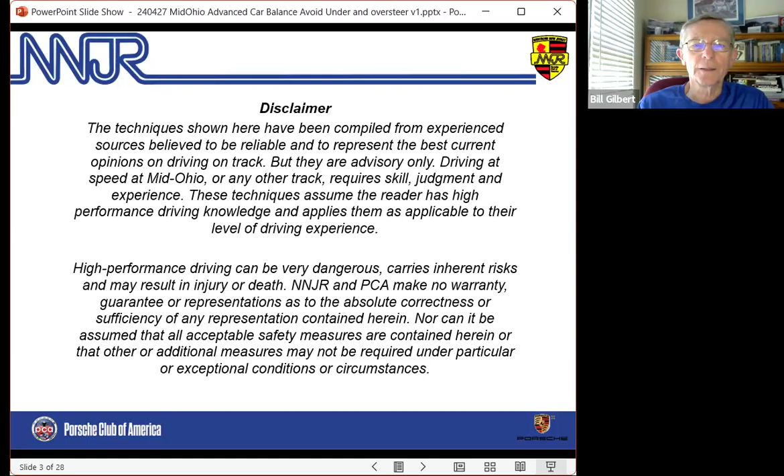But let's dive in. So car balance. First, the normal disclaimer: we're going to talk about some techniques and tips here today that we hope you'll find useful, but you use them at your own risk.

So here's some definitions and examples about balance. Vic Elford, who some of you may know, was a terrific driver back in the day and recently passed away. He said in his book about driving, and in talks that I heard, that it's all about balance - more important than any other aspect of driving the car.

And here's some quotes about how professional drivers are rarely in a hurry. They're smooth, flowing transitions - those kinds of words.

So what determines car balance? Well, obviously car setup does, and we're just going to touch on that very briefly today. But I have some material in the appendix that, if you think your car setup needs help, will give you a nice cookbook for how to go about improving it.

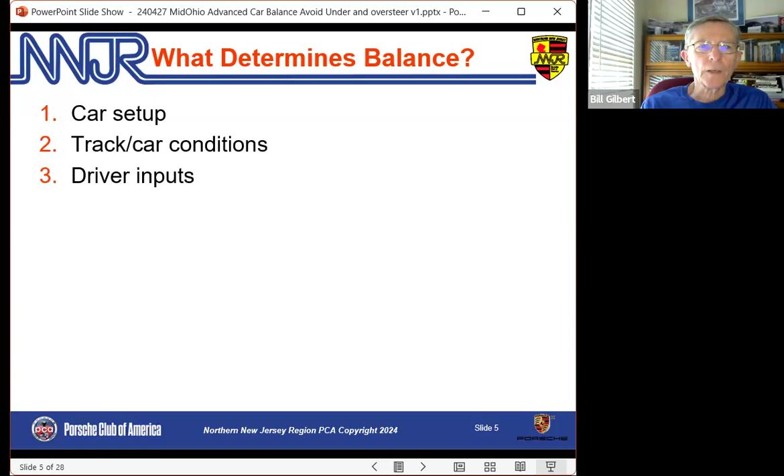Next, the track or car conditions can affect car balance. Obviously a wet versus dry track or a hot versus cold track may affect it. And last, but not least - in fact first - are driver inputs. What the driver does can affect car balance, frankly, more than anything else, unless the car is set up very, very poorly.

So let's dive in. First, car setup. The good news is modern Porsches are set up very well by the Porsche engineers. And so if you have any modern Porsche - or even one from 30 years ago - it's set up pretty well. Partly as a result, most cars that come to a DE event have very good handling. So balance may not be perfect, but you might need a pro to find out.

And to that point, as the slide says, at some point any car is going to have some kind of a handling issue. But if I as a driver am not good enough to feel the handling issues, then focus on the driving - the car is immaterial at that point.

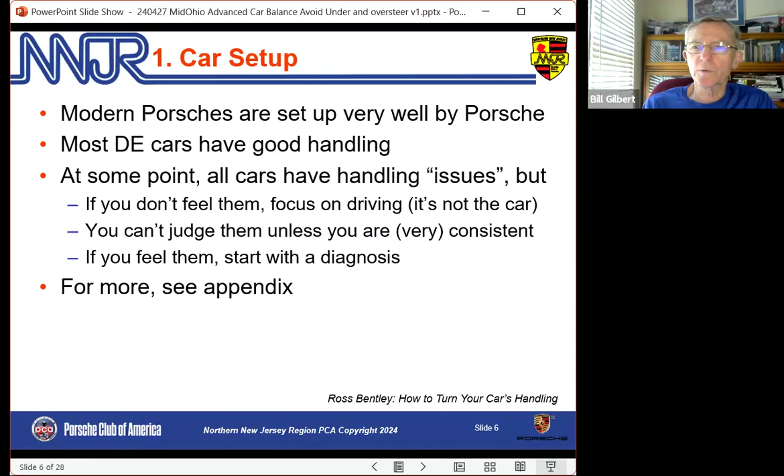Anyway, there's a lot more on this in the appendix, so you'll have the slides and references to some great Ross Bentley material on that. Because today I want to move on to other things that affect car balance, mainly the driver, but we'll talk briefly here about track conditions.

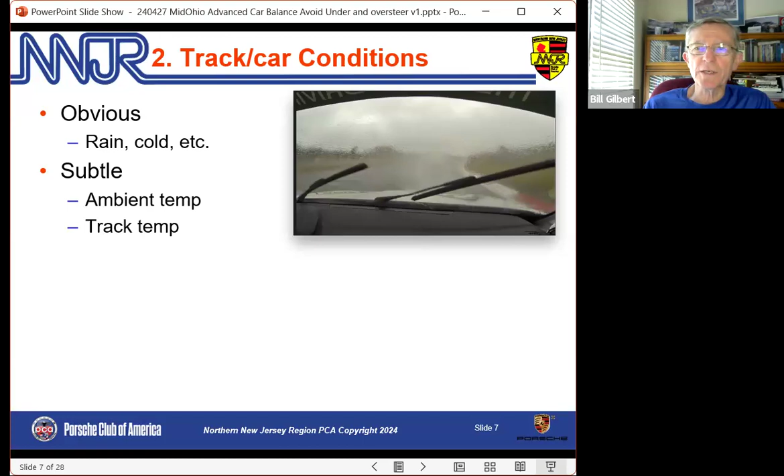Now obviously, like I said before, rain versus dry, cold versus warm - those are pretty obvious if they're extreme, but there are much more subtle track conditions that we think about less. The ambient temperature might be 60 degrees in the morning and 80 degrees in the afternoon. We may not think about that difference, but it does make a difference.

And track temperature is not quite the same, because if it's 60 in the morning and 80 in the afternoon but it's all clouds, that's different than a day where the sun is out. The track's going to be much warmer on a day with the sun out.

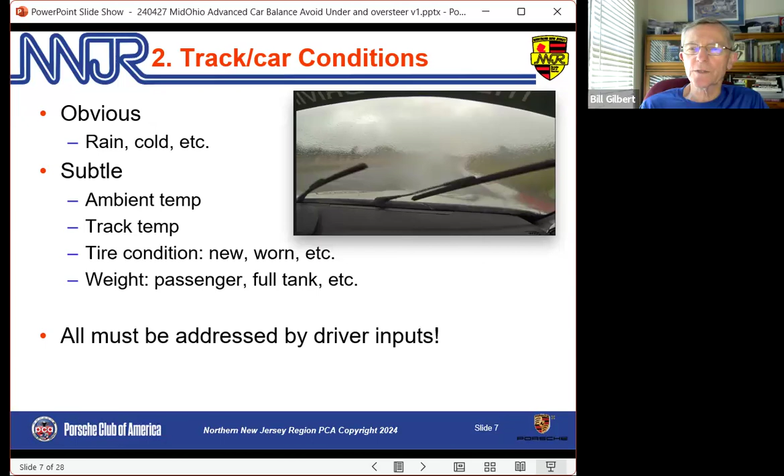And of course tires on the car make a big difference - are they brand new, are they worn, how many heat cycles, depending on the tire you're running. And then the weight of the car - modern cars weigh quite a bit, but whether you have a passenger or not makes some difference. A full tank versus a quarter tank - these subtle differences you need to be aware of. The point I really want to make is that all of these track conditions or car conditions have to be addressed by the driver.

And so now we're going to talk about car balance as affected by the driver. And to do that, the term I want to introduce is weight transfer. For those of you who are engineers, it's technically load transfer, but I'm going to call it weight transfer.

All cars move weight around. I'm going to show that in a minute, but moving it suddenly is a bad thing. Weight needs to move smoothly and once. If we move weight suddenly, what happens if we turn the steering wheel suddenly into a corner and load up the outside in a rapid fashion? If we do it too fast, we've compressed those springs, and they're going to push back, right?

Whereas if we load them up gently and smoothly, they're going to stay compressed. And that's why the only once is here. And the other point here, which is more subtle, less load transfer is better.

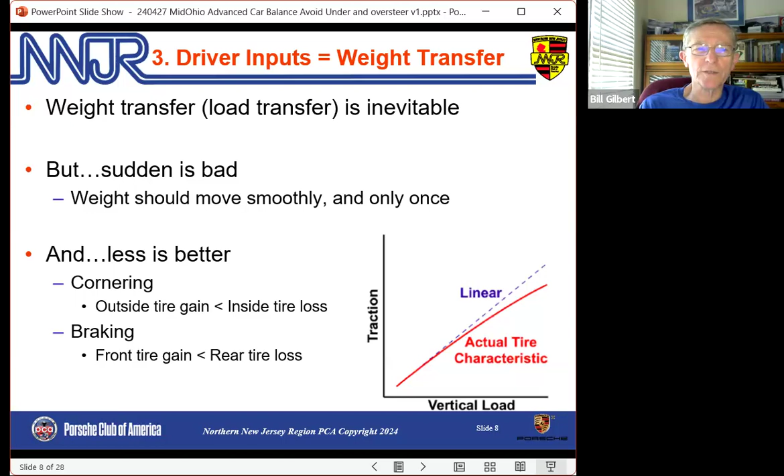The reason is the graph you see here: yes, traction is proportional to weight, but not 100%. It's not 1-for-1. The more weight you put on the tire, the less grip. So when you're cornering, yes, the outside tires gain grip, but the inside tires lose more. Same thing in braking: the front tires gain grip, but the rear tires lose more grip. So if we can drive well with somewhat less weight transfer, we're going to have more grip and be able to go faster.

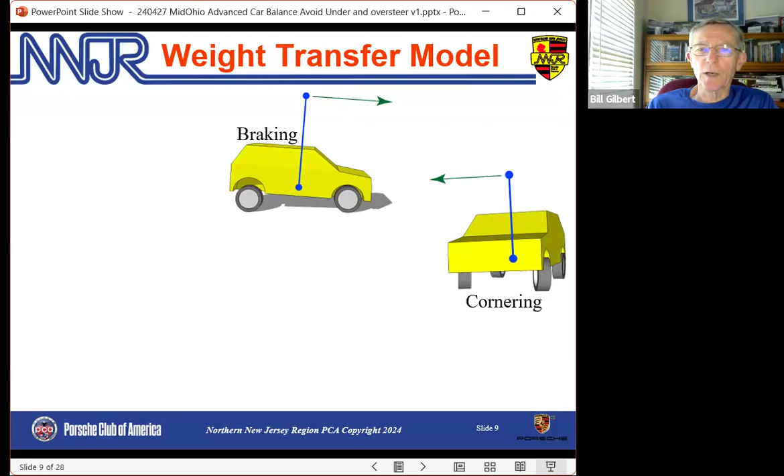We're all aware that when we corner or brake, we move weight, right? We move weight forward when we brake, we move weight to the side when we corner. But we often don't think about how much weight that really is. Here's some rules of thumb: when we corner, we're moving about 30% of the car's weight. When we're braking, we're moving about 20%. So think about that—we're moving 1,000 pounds around on a 3,000-pound car.

That's a huge amount of weight. When we brake, we're putting an extra 300 pounds on each front tire, and we're taking 300 pounds off of each rear tire. That's a lot. Cornering's even more—500 pounds on each one of those outside tires. So think about that next time you turn the steering wheel on the track.

You're moving 1,000 pounds from one side of the car to the other. When I first went through this math, I was a bit astounded. It's an amazing amount of weight that we're moving around with the steering wheel and the brake pedal.

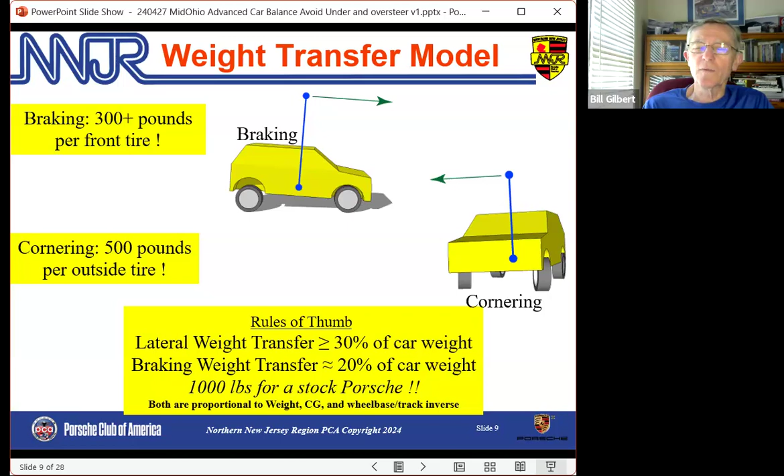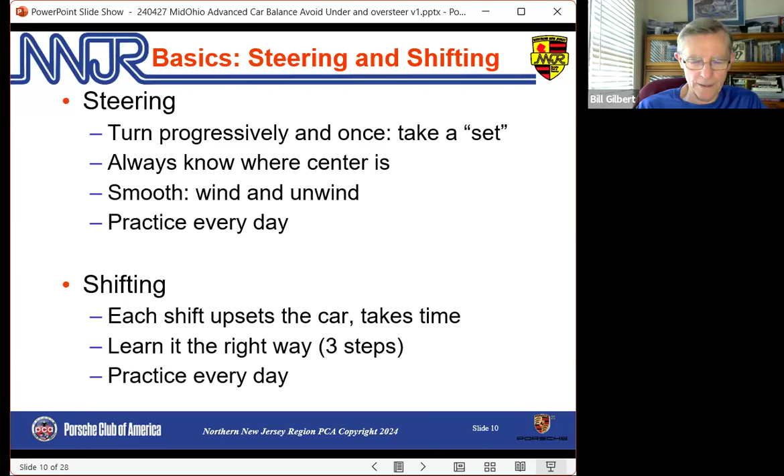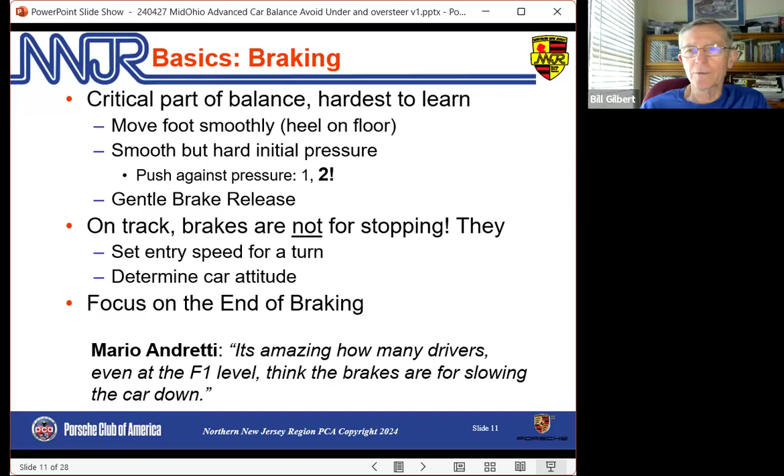We all know brakes on the track are setting our entry speed. They determine the car attitude, and in particular, the end of braking and what we're doing with the brakes in the first part of a corner after turn-in is where the magic happens, right? We've all seen the Mario Andretti quote about how too many drivers think the brakes are for slowing the car down.

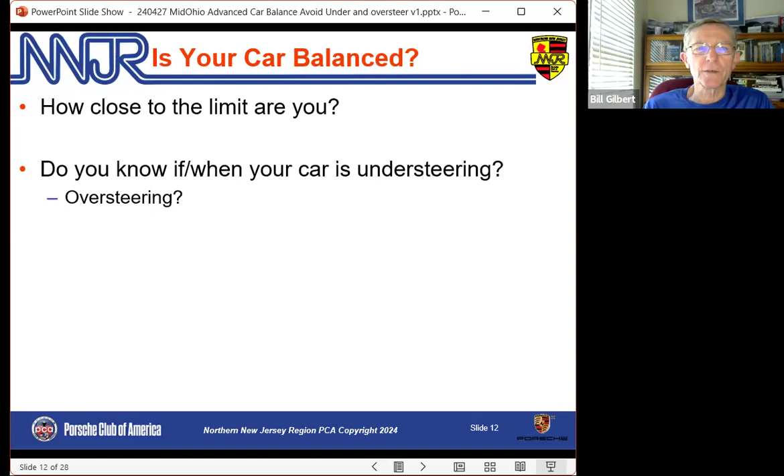So, how to think about whether your car is balanced or not—here's a few things to think about. One: how close to the limit are you? If you're not close to the limit, it's probably immaterial, right? You're not pushing the car hard enough to really know. But if you are approaching the limit, do you know?

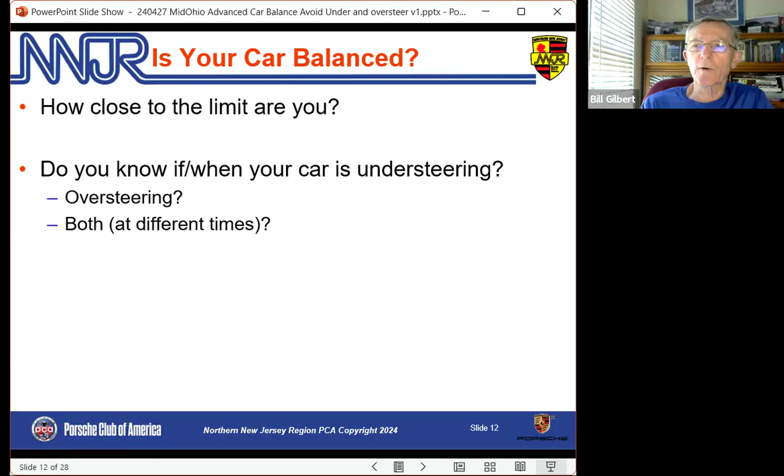Can you feel if the car is understeering or oversteering, or doing both at different times? Maybe it's understeering early in the corner and oversteering later in the corner. So how do you know that? And most importantly, do you know if PSM's intervening? Some drivers drive routinely with PSM intervening and aren't aware of it. I hope you're not one of those, but we see that too often.

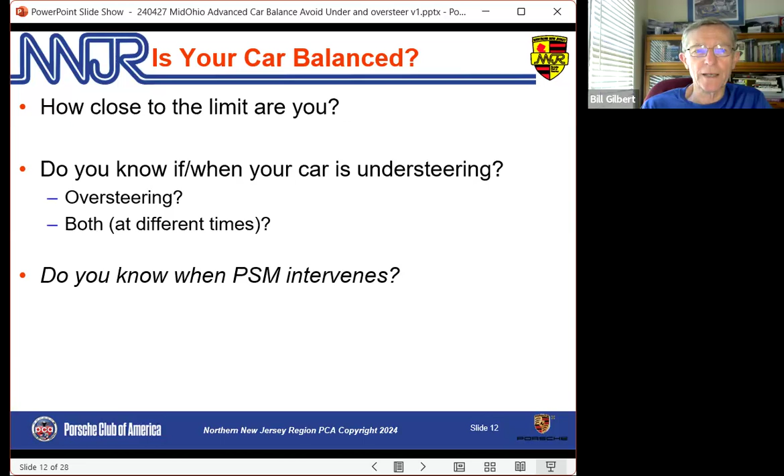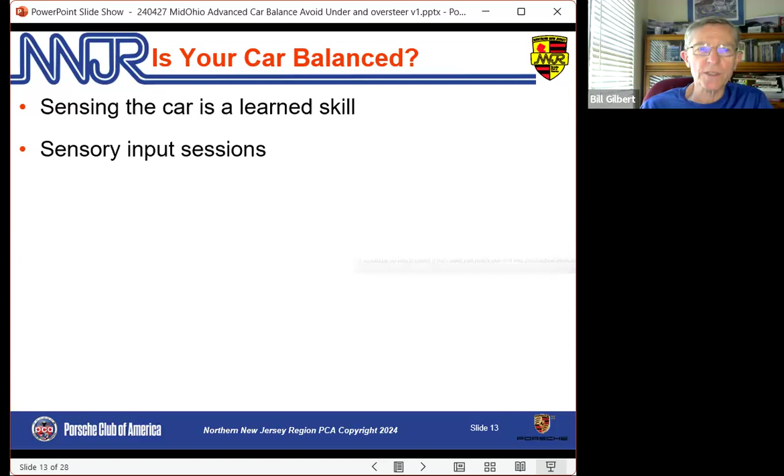So some things to think about: sensing the car, where it's at—understeer, oversteer—is a learned skill. And here's one way we can do that. Besides practice on a skid pad and all the rest of that, we can do sensory input sessions when we're at the track. We can take a session where we focus entirely on what sounds we hear.

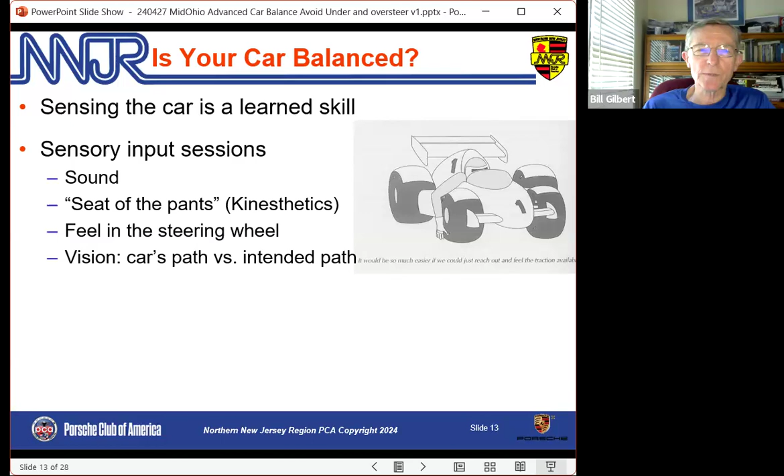We can do another session where we just focus on our seat of the pants and what we're feeling in the car. This is a great way to heighten your sense of exactly how well balanced the car is, how sharply it replies to my commands, and so on.

Now let's briefly talk about understeer, and then we'll talk about oversteer. Here's some common driver causes of understeer. You can have not enough weight on the front tires.

If we pop our foot off the brakes right after turn-in and the car doesn't want to turn, that's driver-induced understeer because of jumping off the brakes. There's lots of examples I could have used here - Watkins Glen turn 1, the keyhole, or turn 6 at Mid-Ohio, Lime Rock, the left-hander, or turn 1.

There could be a long list, right? You might think of this as a beginner mistake, but it's not, because the slide says abrupt brake release, but it can be not quite that dramatic.

Now, a different type of driver-caused understeer is just too much gas too soon, and that again can happen. My favorite example of that is the toe at Watkins Glen, where it's very easy - we're very tempted because of the hill to want to get on the gas, but oftentimes we get on the gas and the car immediately washes out.

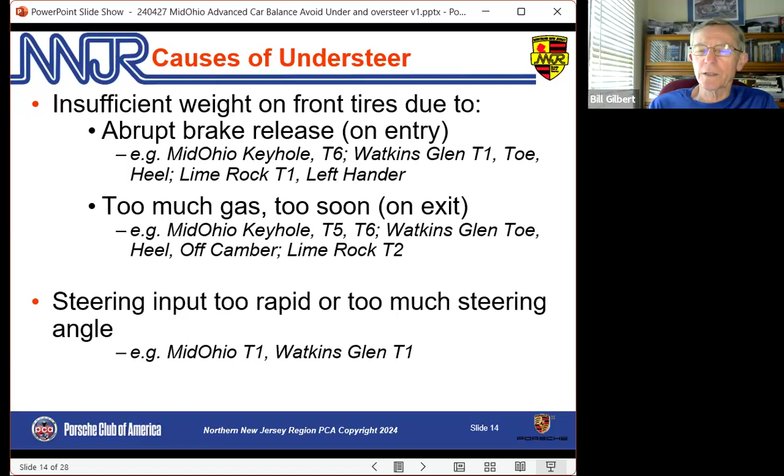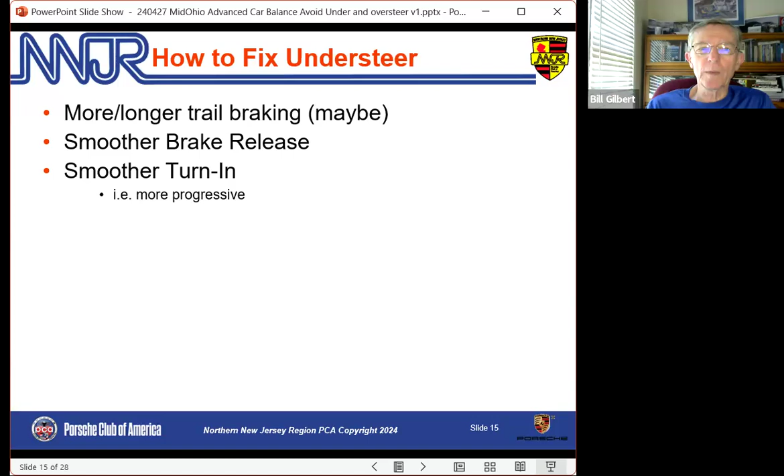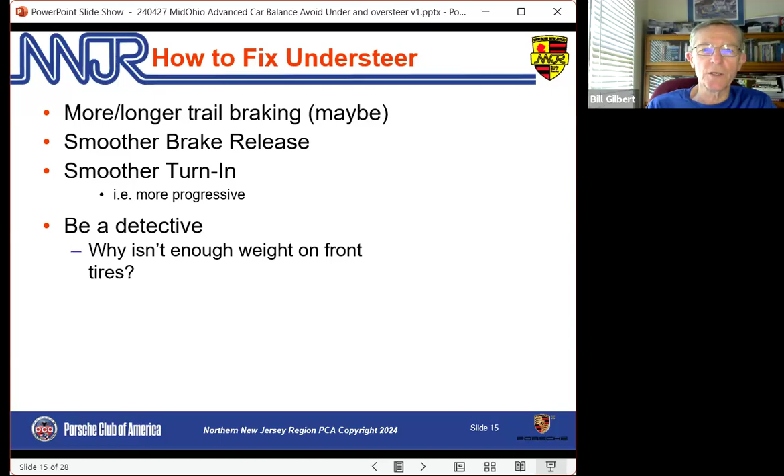So again, if you feel like the car is understeering, think about this, because here's how we fix understeer: probably more or longer trail braking, a smoother brake release, a smoother turn in, maybe a more progressive turn in. But regardless, if you feel the car is understeering, you have to turn into a detective and figure out why isn't there enough weight on the front tires at this point. There's some reason the car is not doing what you're asking it to do, and it's time to figure that out.

Let's talk about oversteer the same way. Driver-induced oversteer - too much trail brake, a very common one. That can happen in almost any corner. If we go in on too much brake, too deep, and not enough weight on the back, it's going to feel nervous or worse.

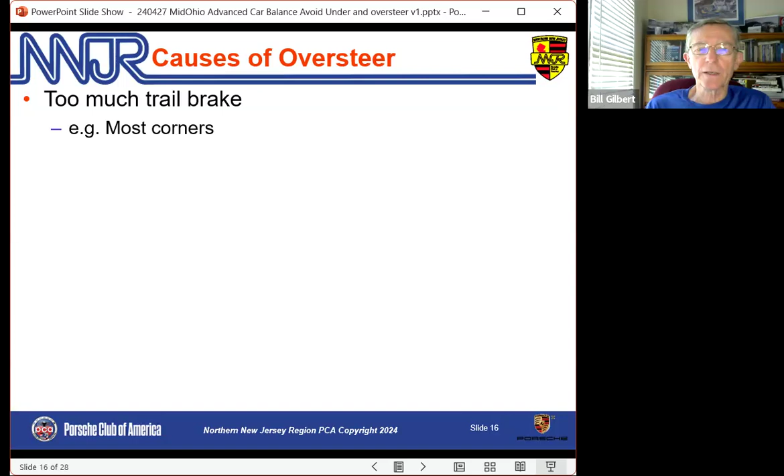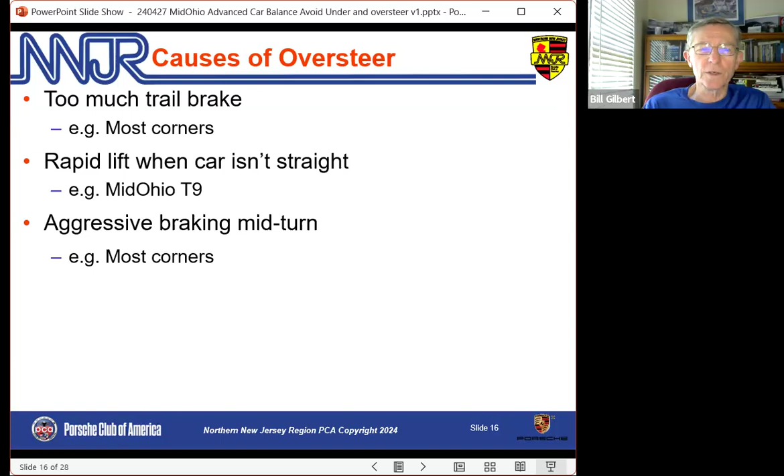Obviously, if we lift and the car isn't straight, the car is going to oversteer. Turn 9 at Mid-Ohio, the car's not straight where we want to brake - if we brake too hard there, the back end can get light. If for some reason you're on the brakes too much or way too deep in the middle of the corner, the car is going to get light.

And then power-induced oversteer - that can happen on almost any corner with a powerful car. If you get on too much gas too soon, the back end's going to step out.

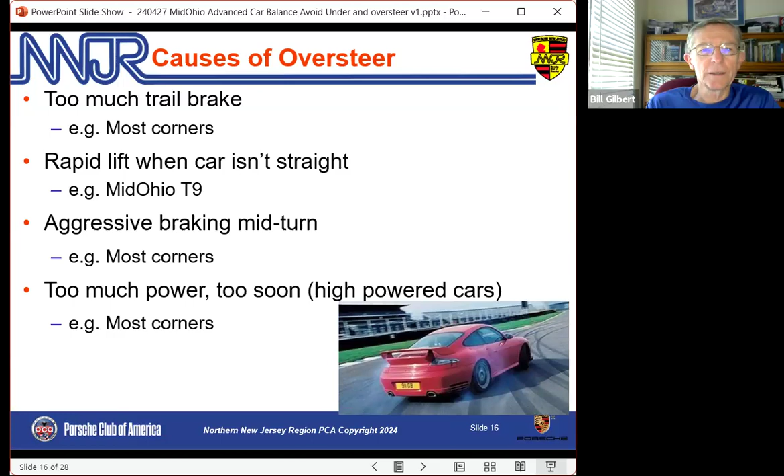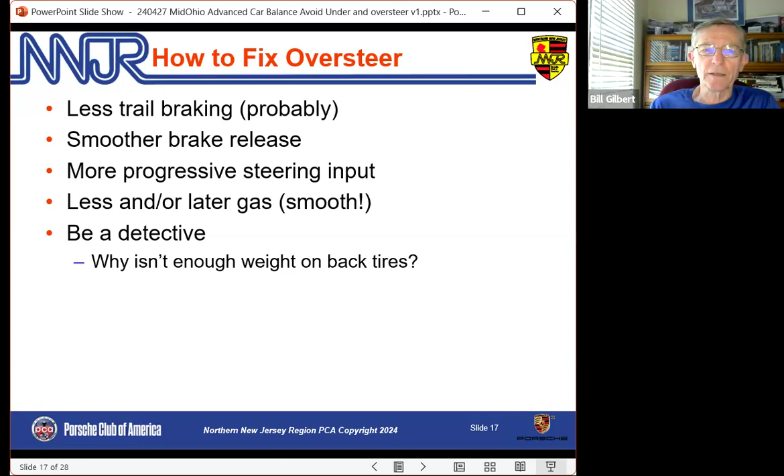So how do we fix that? Well, with the exception of the last one, probably less trail braking, not always, but probably. Smoother brake release, more progressive steering input, being aware of when and how much we get on the gas. But again, we've got to be a detective - why isn't there enough weight on the back of the car in this case?

Now, just to summarize on understeer and oversteer, I love the way Randy Pobst talked about it. His comment was: understeer is slow, but oversteer is scary. So be aware when you're thinking about your own driving and car setup and so on. Most drivers would agree with those assessments.

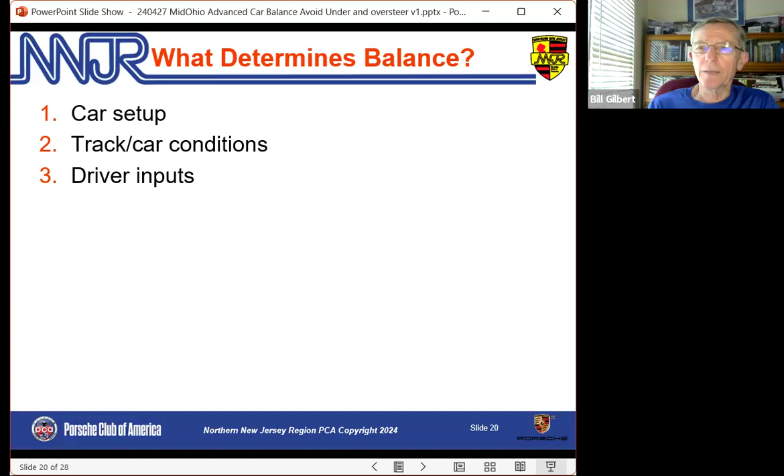So to summarize, balance is all about moving weight around where and when you choose to, because again, we're talking about weight transfer, talking about being smooth with how the controls are used. It's determined by the setup of your car, by the track and car conditions, but most importantly for most of us, by our inputs to the car.

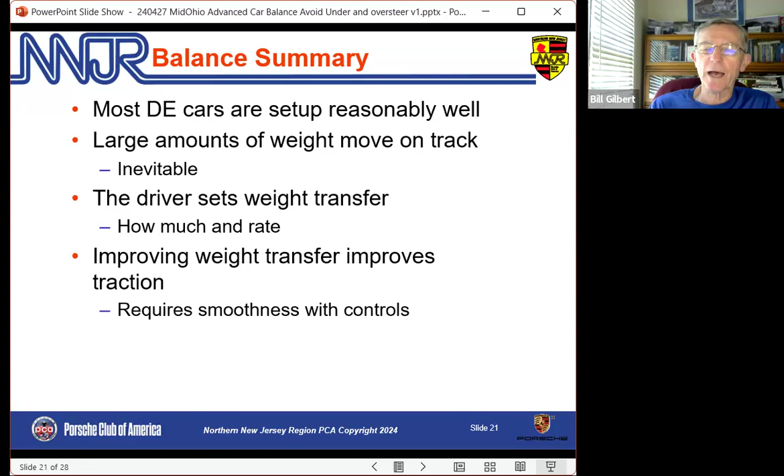So my summary: your car is probably set up pretty well, but be aware of these large amounts of weight that you're moving around on track, and that you're the one determining how much and how fast. If you improve that weight transfer, you're going to improve traction, you're going to have better balance. And if you're not feeling like the car is properly balanced, then you've got to become a bit of a detective to solve that.